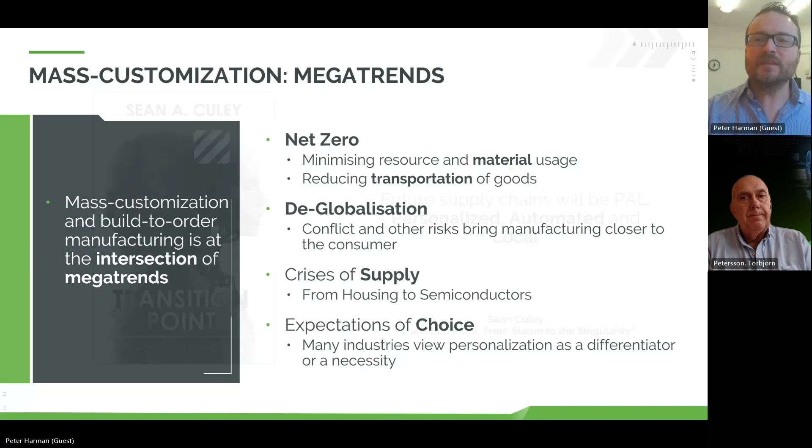A reference that I like about this particular point is this book called Transition Point by a guy called Sean Culey. This is looking at all the changes that we're going through in terms of another industrial revolution. But really one of the key things here is this idea that future supply chains will be personalized, automated, and local. So products will be made for people as they want, where they want them. And what we're excited by is creating the technologies that actually allow us to deliver that.

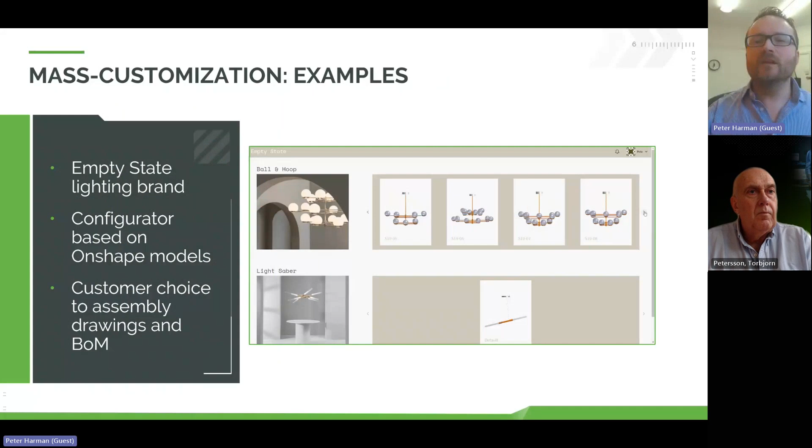So as a company, we've been doing this for a few years, and there's a range of technologies we've developed. One of those is configurators, so actually allowing either an end customer or a reseller or someone who is not the design engineering expert to configure and set up a product ready for manufacturing. A key part of what we do that's unique there is we follow the data all the way through from the real CAD data all the way through to how that product is being made.

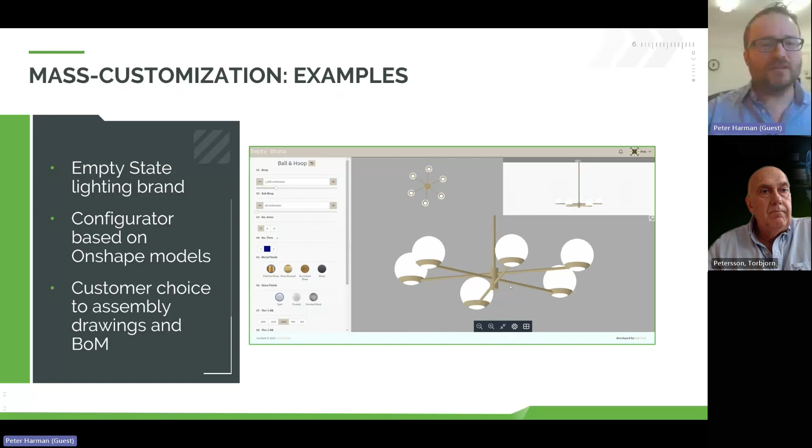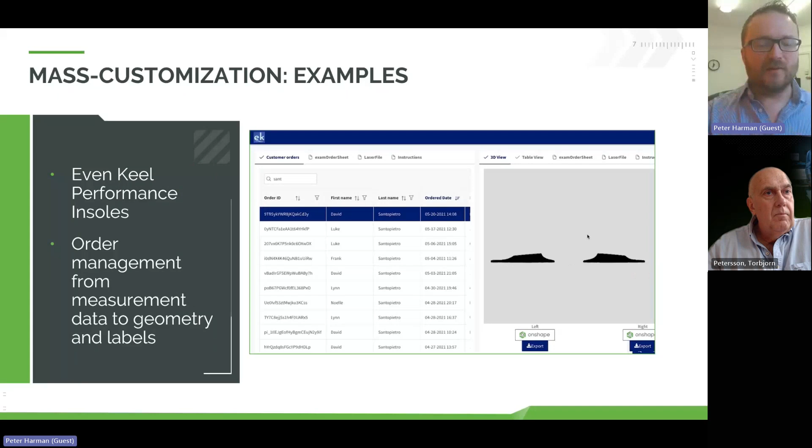We've worked with a number of customers via working together with Onshape on this, and I'll come into some reasons later on why Onshape is such a good platform for doing this kind of work. In terms of how things have been manufactured by those customers, we're generally generating assembly drawings. We've also generated CNC data where required. And so, another example, we can track the orders coming through of a mass customized product and then generate the manufacturing information and shipping labels, instructions, all the things that are needed.

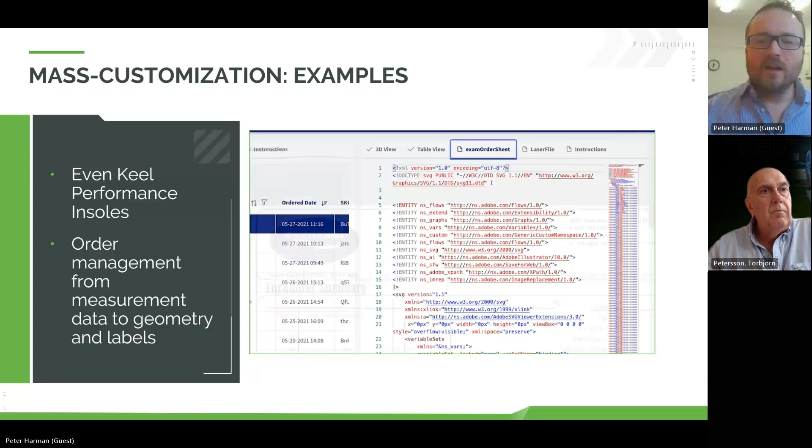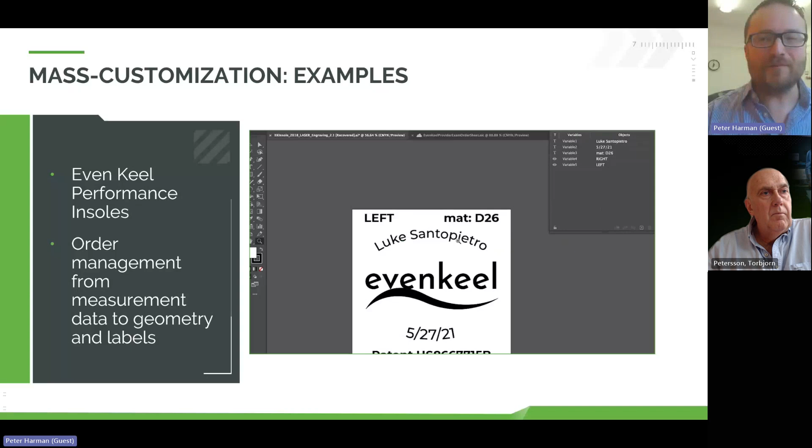So for these specific use cases, this is fantastic, but how can we generalize this idea a bit more of mass customized products? How are custom products actually made? Whenever we say mass customization to people, they say, oh right, so you're 3D printing things. And we have to say, well, no, actually, we're not.

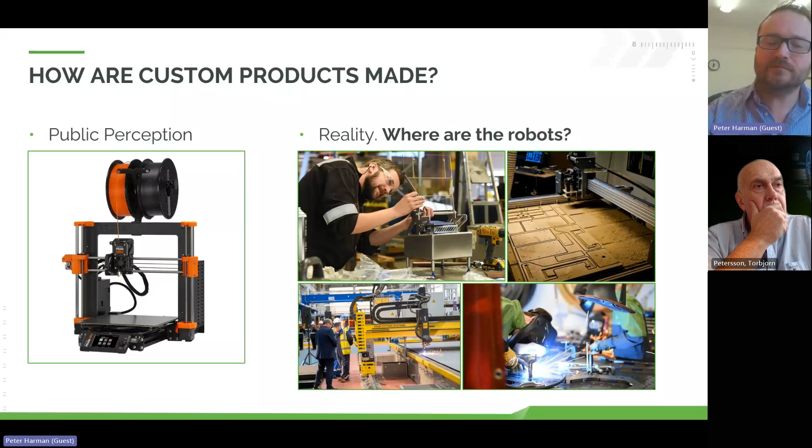And we're cutting out the fact that actually to create a custom product, you as the engineer need to be directly involved in that manufacturing. So this is the advantage of bringing the CAD data all the way through. But the question we ask, ignoring the 3D printer, is where are the robots? Because a lot of products out there are being manufactured using robotic assembly, but that's not something we've ever come across in terms of mass customization.

So that was the challenge that we set: could we assemble a product that's customizable using a standard industrial robot? So what would that involve?

So the current process, if you wanted to actually change a robot program - imagine you have a robotic cell, it can assemble a product, we want to change that product - what do we have to do? Well, we need to plan our assembly sequence for that product, and determine what that means in terms of the robot: what are the waypoints, at what point does it open and close an end effector.

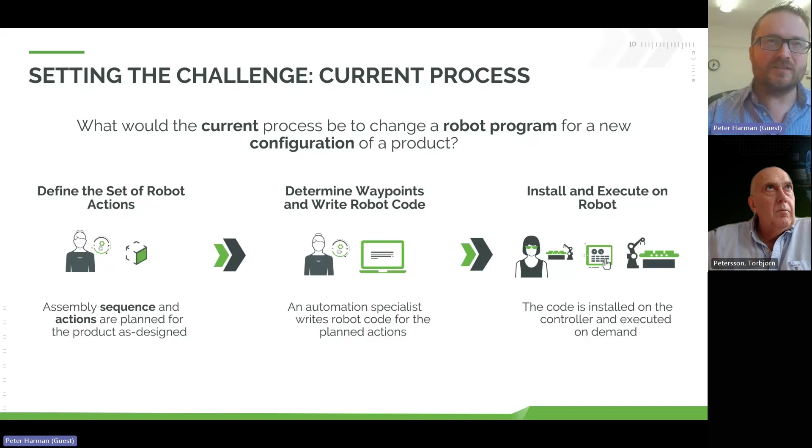Or use additional functions like gluing, welding, and so on. And then we need to install that onto the controller of the robot, and set that up for execution as part of our manufacturing process. We've had various expert engineers involved in this. So actually, if we're going to change the robot program for each configuration of a product, that's not going to work.

So what we want to do is the first step once: define the set of robot actions that will take place to build our product, but accept that those are parametric. So the positions of things might be different, the number of times we do certain operations might be different. For example, one of our operations might be to drill a hole in something, and we might want to do that multiple times in different places. So we can define what that sequence of actions are.

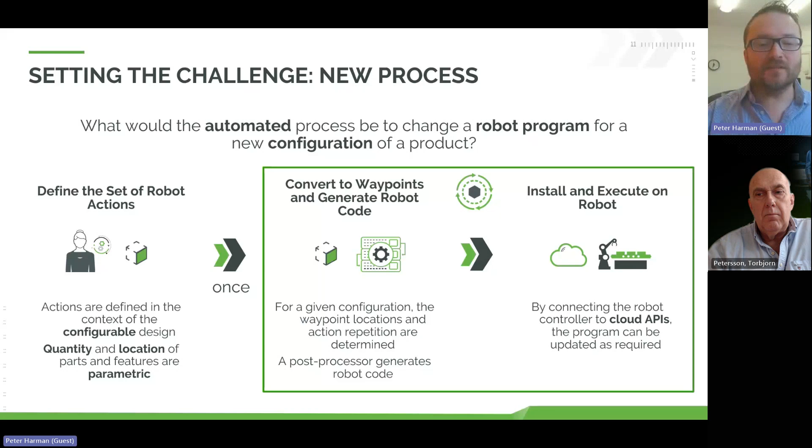And then for our waypoints, we want to consider those as positions within 3D CAD, because we know our 3D CAD model can be parametric. So we can make changes and react to where things have moved to. And if we can generate our robot program from those changes in the CAD, and connect directly with the robot, we can send the new robot program to it. So we can define this new process for how we could do it.

We wanted to prove that this was possible. We don't have a robot cell sat lying around, but we have friends who do - this is the Manufacturing Technology Centre here in the UK. They are what's called a catapult: part government funded, part industry funded, to bridge the gap of technologies between academia and industry. So they're doing applied research and helping companies develop new technologies.

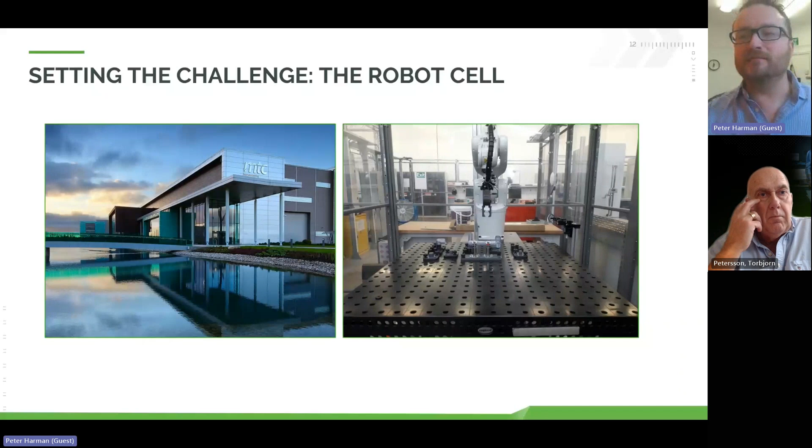So we brought the challenge to them. We said, what if we wanted to assemble a customized product? Give us an example of that. And they came up with the idea of a system of plastic pipes where we might want to assemble together different configurations of those pipes, as a good example of a real mass customized product. And of course, they provided us a robotic cell with an ABB robot in it.

And that is built correctly with all of the joints of that robot, so we can actually move the robot around within the CAD model. And then we've got a model of the robotic cell, so we've combined all of those CAD models together. We were helped in doing this by Crusoe Technologies in India - they are a QA partner of PTC's.

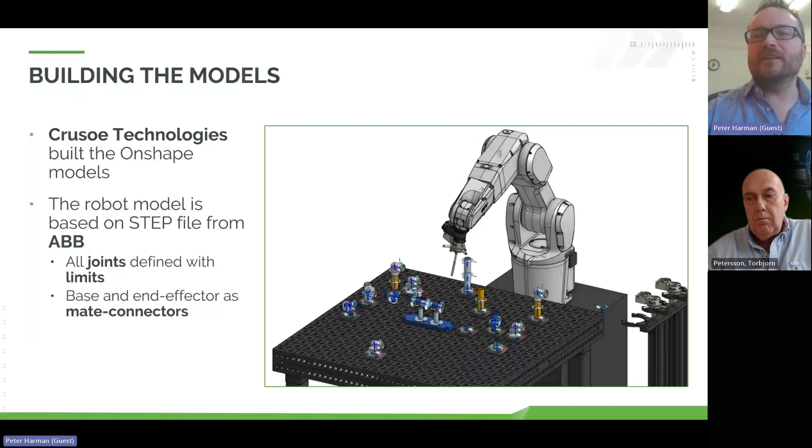Looking in closer detail, we've modeled up each of the components that we can assemble together. We've also got the mounts of how they sit within the robotic cell, and we've used mate connectors to define where those parts are going to join together, and where the robot gripper is going to grip them.

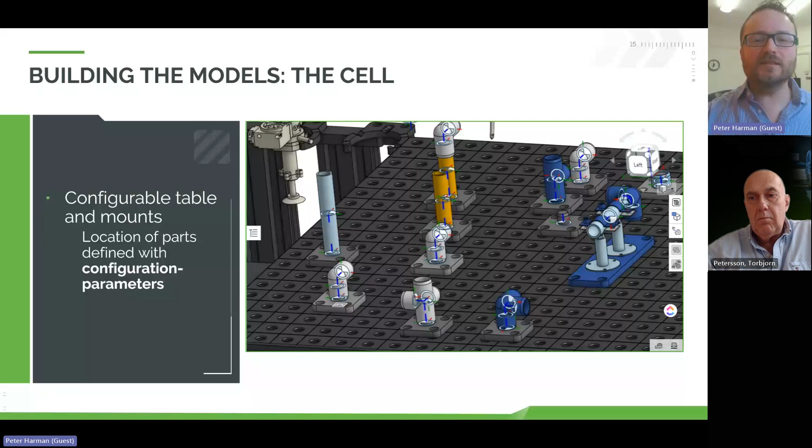The table in the robot cell is configurable, so we can use parameters within the CAD to move components around to different places, which is very important. We've put everything together, and we've used another mate connector to define what the coordinate system is as far as the robot is concerned.

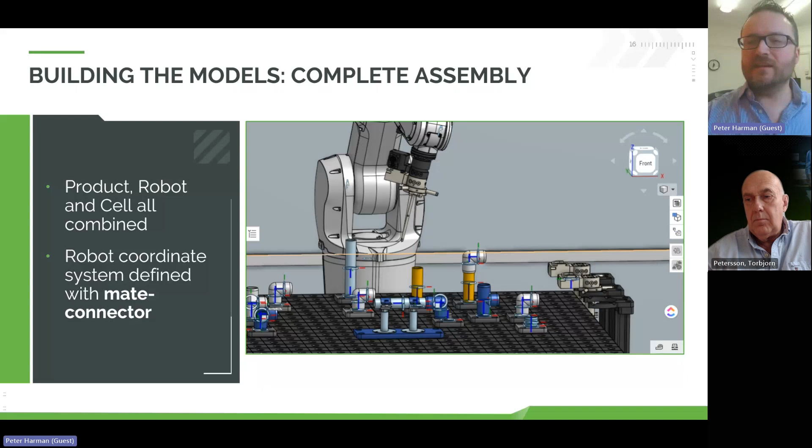Anyone who's done offline robot programming will agree that one of the key things is getting the coordinate system that the robot knows to match the coordinate system that your product is in. Again, that's something we've set here using a mate connector.

As a software company, we've developed some prototype software and embedded it into the Onshape platform, and we've defined a series of actions that we want to perform.

We want to move the robot to a given place, open and close the gripper we've got on it to pick parts up and then go and place them somewhere. And back to the mate connectors again.

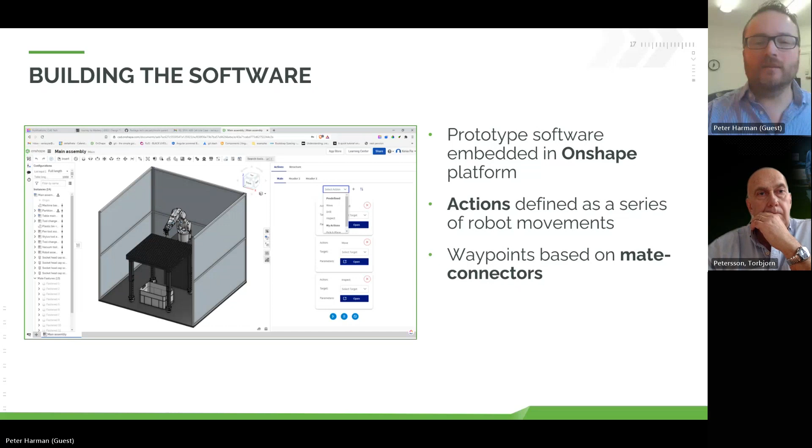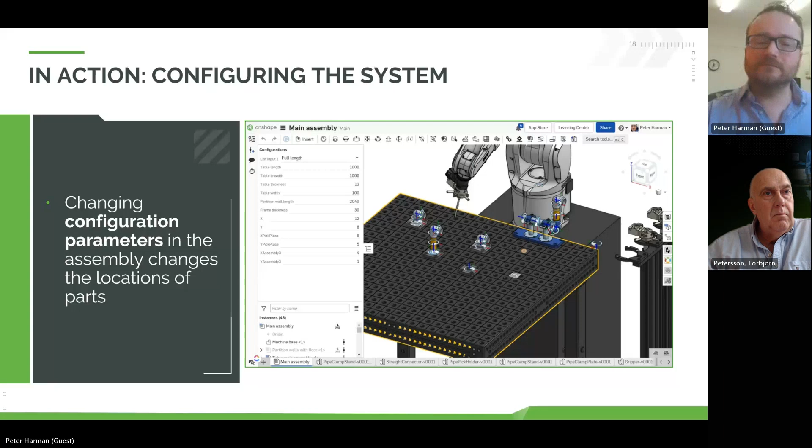Each of the waypoints we're moving to is based on the location of a mate connector. For example, we're going to pick a given part and grip it on the gripper mate connector that part has. Now we've got our complete CAD model and our software in there, and we can change configuration parameters within Onshape, which will move parts around and change the configuration that we're going to build.

One part of the software we didn't build is how to actually get that robot program onto the ABB controller. One thing we were keen to do is not mess with the actual controllers on the robot itself. The closest academic research we'd seen had involved changing the controller that the robot uses, but that was something we viewed as a risk that a real industrial manufacturer would not want to go through.

Firstly, they'd destroy any warranty and insurance they have on that ABB robot if they were to mess with the controller. So instead, MTC have developed tooling that can push new robot programs into the ABB controller. Our software is generating, in this case, ABB Rapid, their programming language for robot programming. We've ensured that the running of that program and the simulation of it to ensure it's valid is all done using ABB's own software, eliminating any risk of driving robots through tables, which is very easily done.

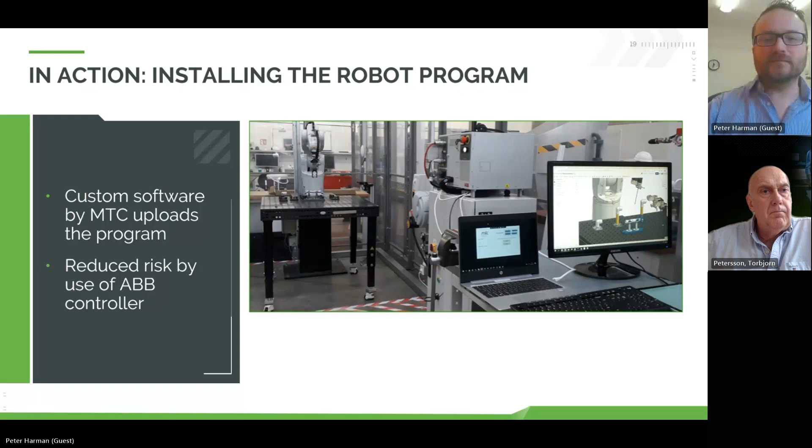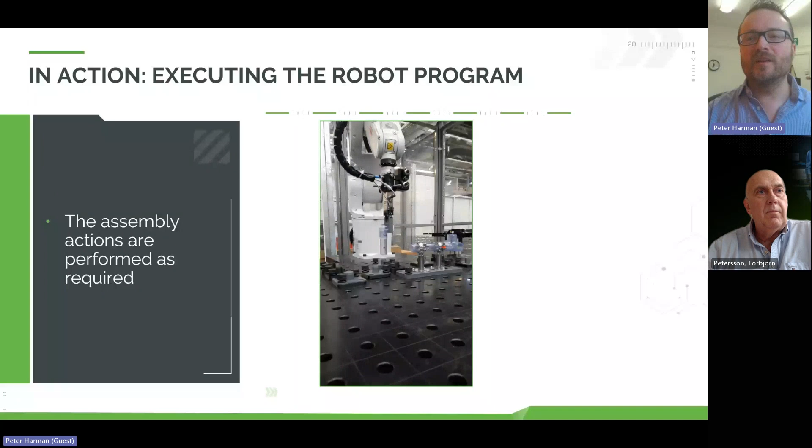The fun part is we actually get to watch a robot doing it. This was an incredibly short project. The robot was assigned to this project for 4 weeks, but we only had access to it for testing for 2 weeks. So this is essentially a 2-week project of proving a whole new process, and the result is our robot can assemble together our system of pipes correctly, entirely defined by parameters in the CAD.

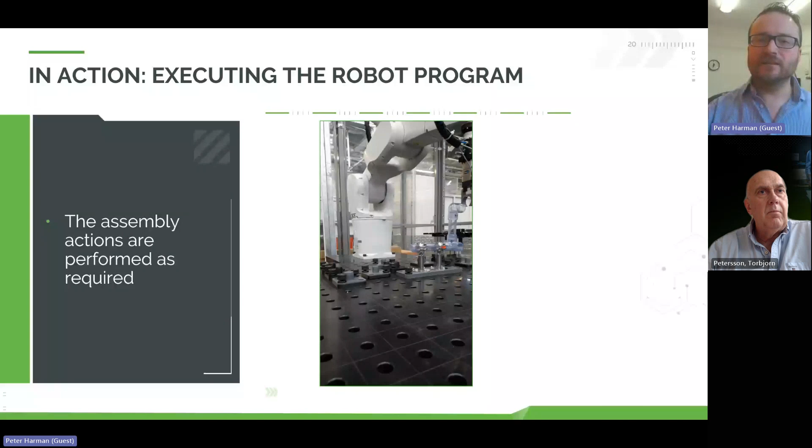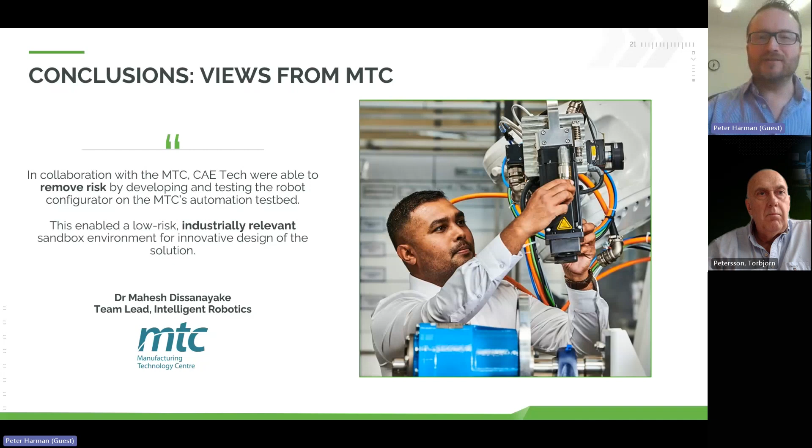This was in collaboration with the Manufacturing Technology Centre. Their aim, their existence, is to de-risk this kind of technology development. From their perspective, they've proven that this is possible, and this is a case study that they show to their members and customers to demonstrate that this is possible. They were very happy that we had proven a new, as they say, industrially relevant solution.

So what's the advantage of using Onshape for this? Firstly, the obvious one, Cloud CAD is collaborative. Those CAD models were made in India, we were working from our office in Leamington, and MTC is in Coventry. At no point did anyone need to install any software, and at no point did anyone need to send files anywhere. It's all entirely accessed via the browser.

We could integrate a custom user interface in there and use the APIs that Onshape gives us to fetch the data from it. Very importantly, everything in that model is configurable, so we can change parameters. It will change locations of things, dimensions of components, the number of those components that appear in an assembly. The entire model can be parameterized.

When you look at the actual modeling features within the CAD, the mechanism joints that Onshape has allow us to ensure that we can do path planning and reachability analysis with that robot, because we can move the robot in a realistic fashion within CAD.

The mate connectors allowed us, just by placing one single mate connector at a point, to define what the transformation was between the CAD coordinate system and the robot coordinate system. So that's a very difficult problem solved in a very simple manner.

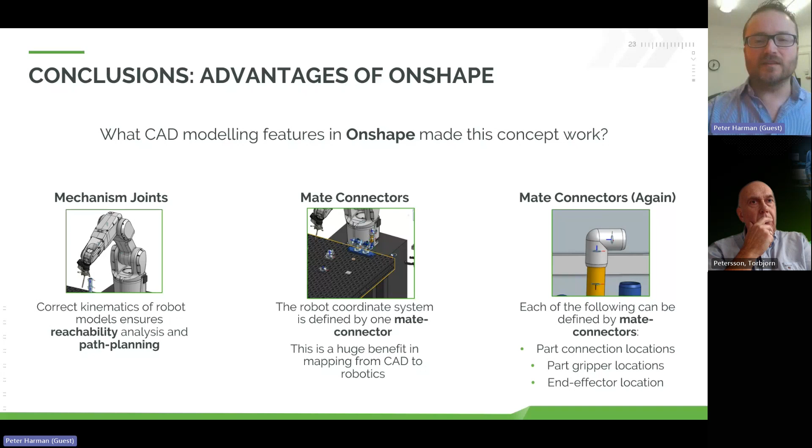Again, the mate connectors, as I showed, we used them to say how the parts connect together, how the parts are gripped by a gripper, and where the end effector of the robot is. So everything we're interacting with is defined by the locations of mate connectors.

I'm just going to show you a quick one-minute video.

RoboForge makes it easy for robot developers to build URDF robot models within minutes from an Onshape created assembly. RoboForge provides an interface to import the kinematics and physical properties from the Onshape robot's industrial CAD assembly, allowing modification of extrinsic and intrinsic properties of the robot elements and configuration of simulation properties.

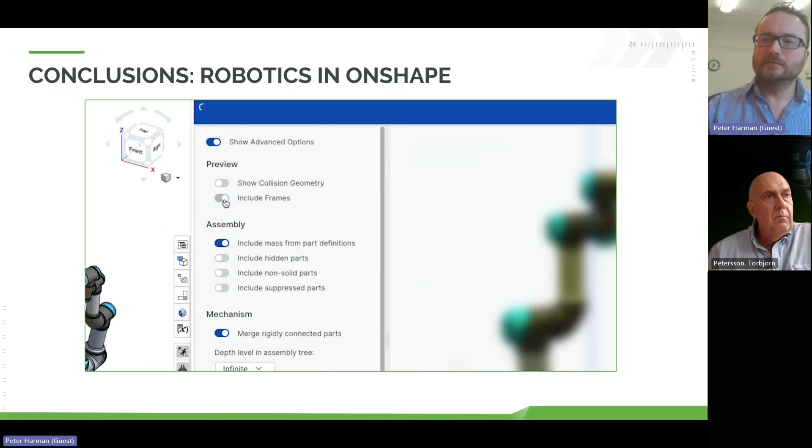Onshape's web-based UI editor enables developers to edit and visualize the robot model. The graphical editor allows visualization of the model as a ROS geometric transform tree. The models are then validated, for example via kinematic tree validation, and a ROS package can be auto-generated for the composed description files.

The generated robot URDF models can be downloaded and used to run in digital twin and simulation environments like AWS IoT TwinMaker and AWS RoboMaker, or uploaded to the developer's S3 bucket or GitHub repository as a ROS package, and directly used with the physical robot visualization and analytics tools.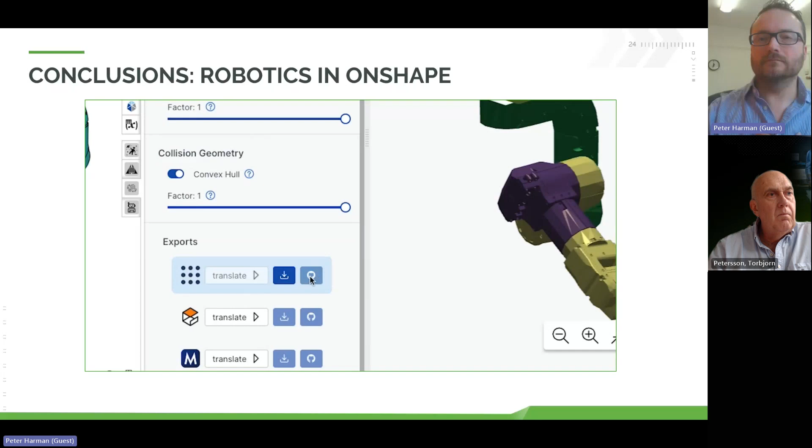So that's where we went with that technology. There is now an add-on available via the Onshape App Store called RoboForge, which does not do the offline programming that we've shown as part of this case study, but it does generate all of the robot models that you can then import into robot simulation tools and robot control tools.

So it's taken a big step towards being able to not just develop robots within Onshape, so you can use Onshape as an ideal platform for developing new robots, but also to take existing robots and their robotic cells and turn those into simulation models to do further simulation and control work on. So as a whole, what we're doing at CAE Tech is we've got a growing tool set for bringing customizable products to market.

So designing products, if you design a product in Onshape, you can use our configurator platform, which is called Infinitive, to deploy a configurator to your customers so they can make choices. We have the ability to generate manufacturing information from that.